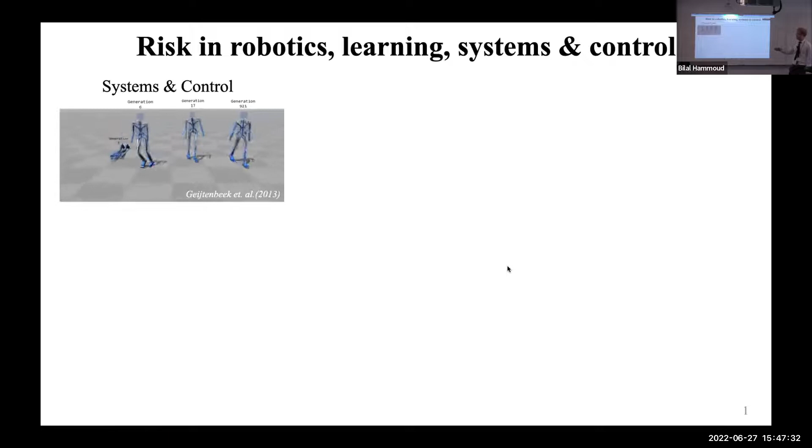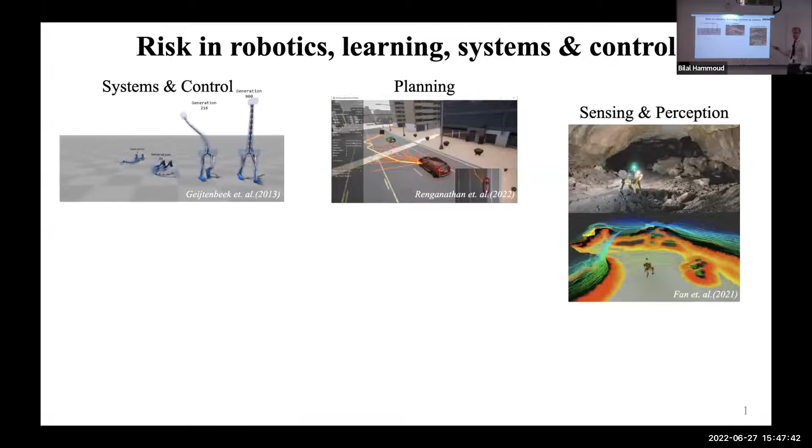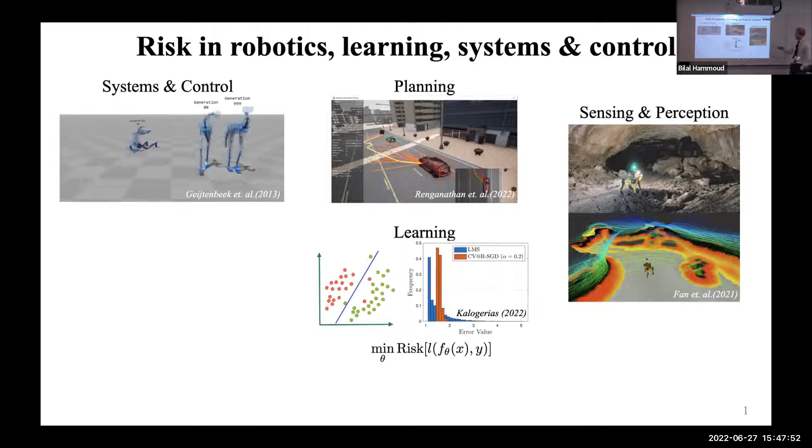For instance, if we look at the bipedal robots over here, risk may measure the likelihood of a failure, right? In autonomous driving, however, risk may measure the cost of a collision. It's a different interpretation. If we talk about sensing and perception, we may have risk maps that indicate risk-free paths. So another interpretation. And in learning, risk has recently been proposed as an alternative to minimizing over the average loss. But how do we define risk when humans are in the loop? My point here is that risk is always a matter of definition.

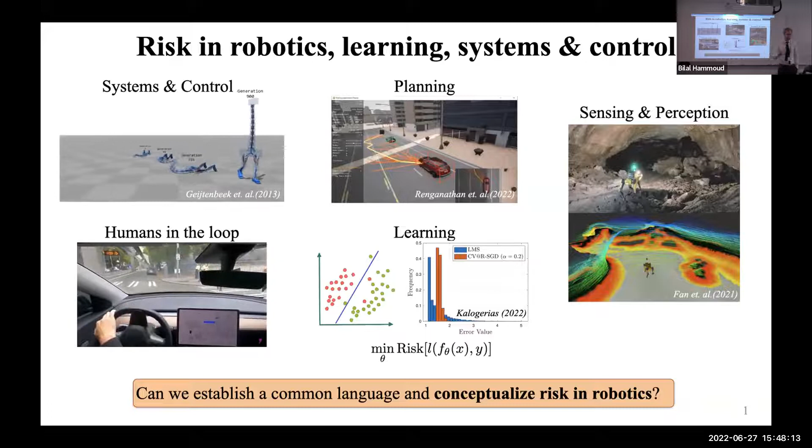My first objective for today, and I think the objective of this workshop, is really to establish a common language to talk about risk and to conceptualize risk in robotics. And I particularly want to do this by bringing in elements from formal methods. My second objective is to then use these new notions of risk to verify AI-enabled systems in terms of their risk. So in brief, what is system verification? System verification algorithms simply check if a system satisfies a specification. So like I said, we are not designing controllers here today.

The way this works is typically you have a system like a car over here and a specification. For instance, you never want to collide and avoid jerky control behavior. You abstract specification and system into a discrete domain. Typically, you use a verification algorithm that will tell you whether or not you satisfy the specification. Now, the question is, why do we want to verify autonomous systems if we can design them in a safe way? Well, most likely, if we design any algorithms, we do this under nominal conditions. However, if we put a system into the real world, there's always uncertainty in our model, in the environment, and in the data that we get.

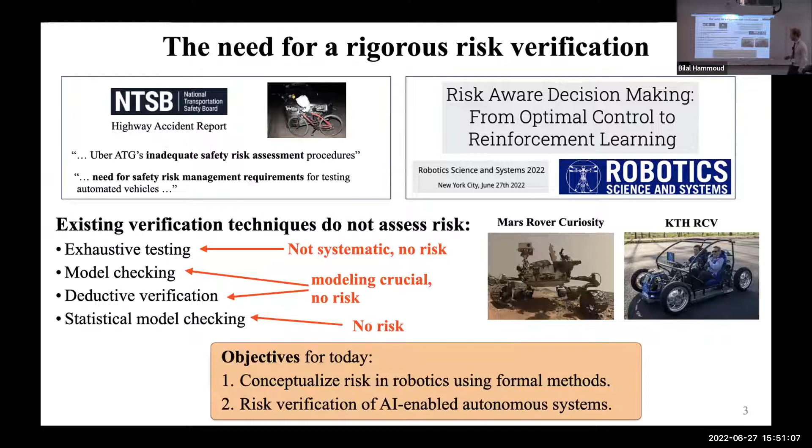And there's statistical model checking. And while this type of literature assumes to have data at hand, there's no use of mathematical risk in the way we want to do. So in summary, the objectives for this talk are first to conceptualize risk in robotics using elements from formal methods, and, like I said, to then use them for system verification. Okay.

I now want to introduce my definition of the risk of failure. And I'm going to give an overview first before I zoom in into the details, all right? Now, in order to talk about risk, we can use risk measures, or as Margaret called them, risk functionals. And I'm just going to repeat them real quick. Let's assume we have a cost distribution over here. Then one risk measure is the expected value or simply the worst case, right? We're here particularly interested in tail risk measures, such as the value at risk, which is the 1 minus beta quantile, or the conditional value at risk, which is basically an expected value over this quantile, okay?

Why are we now interested in tail risk measures? Why don't we use the expected value? Well, simply in that case, we would probably get very good average performance, but we wouldn't be safe, right? Now, if we're interested in safety, why are we not simply using the worst case? Well, if we look at autonomous driving, if we want to avoid the worst case, we shouldn't be driving, right? So in order to get from A to B, we need to be willing to accept some risk, and we need to be talking about tail risk measures, which give us a good tuning knob between average and worst case cost.

Okay, so how do we now define the risk of failure? Basically, the idea that I'm following here is to quantify the risk of lacking robustness against failure. So I'm talking about robustness here. And the reason why I'm doing this is that failure is often caused by lacking robustness against modeling uncertainty, against uncertainty in the environment, or even uncertainty in the data generating process, right? We've heard about distribution shifts today. And I'm going to use two notions of robustness here: spatial and temporal robustness.

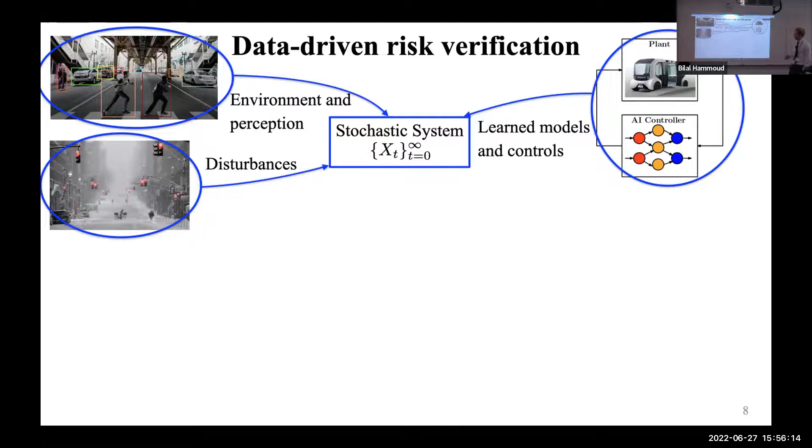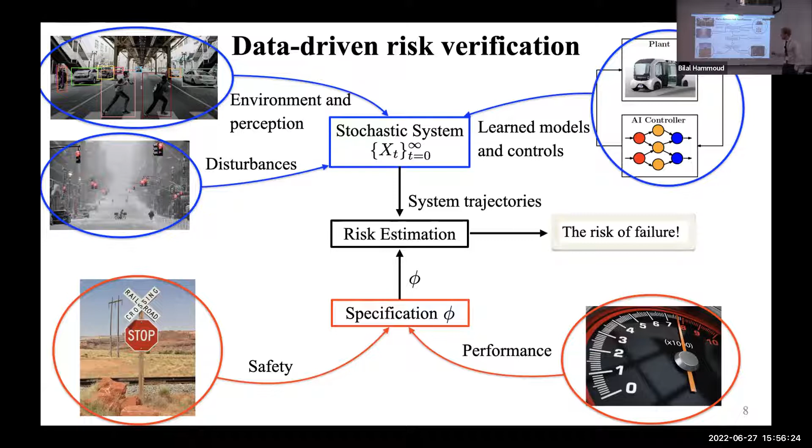Now that we've talked about this, I'm going to give you an overview of the risk verification framework just in pictures. We're assuming that the environment and perception, as well as the system and potentially learned controllers, as well as disturbances, are all modeled as stochastic systems from which we assume that we can draw data, okay? So we can simulate this system. At the same time, we're assuming specifications such as safety and performance, and we're feeding both of these things into our risk estimation algorithm, from which we estimate the risk of failure, okay? So this is the high-level overview.

I want to zoom in a bit now and talk about the spatial robustness risk. And this is again motivated by safety critical applications such as cars or drones, where distances are really something that we're interested in when talking about safety. All of these autonomous systems, they really rely on SLAM techniques to localize themselves in its environment, right? And we're using LiDAR, radar, cameras for this purpose. And naturally, we introduce estimation uncertainty there. We may have also modeling errors that may cause tracking errors in our control, right? So safety really hinges on spatial robustness to such uncertainties and also on risk awareness.

So how can we formally capture this? I've before used this picture of tubes, and we can formally define them basically by taking the distance of a signal X to the set of signals that violate the specification, okay? It's a simple distance to a set, and this will give us this tube. And in fact, it holds that if this distance, this robustness degree, is positive, we satisfy the specification. And if it's 0, it means that we violate it.

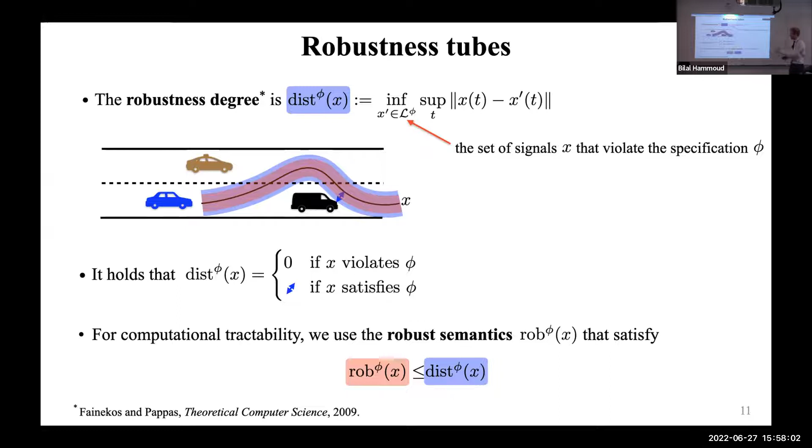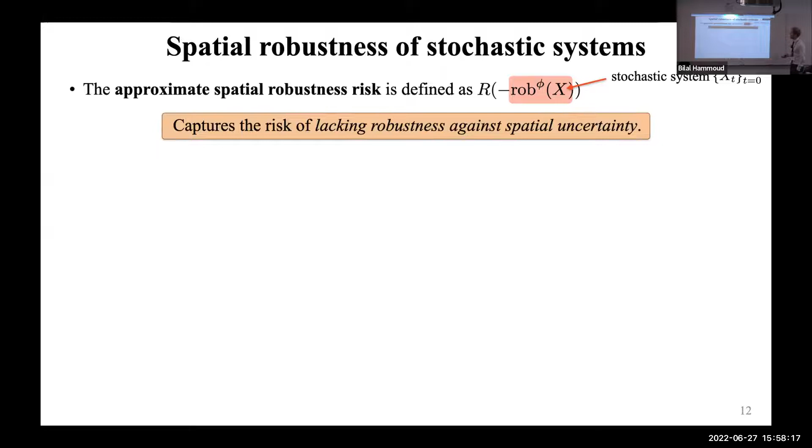So while this is a really nice and neat interpretable definition, it's hard to compute. But what exists there, and I'm not going to give a definition, are robust semantics that you can calculate in closed form. And these robust semantics here in red, they under-approximate the tube that we have. So instead, we're working with a smaller tube that will still give us robustness, okay, as a way of quantifying robustness. So we're using this red notion from now on. And then we define the approximate spatial robustness risk simply by putting a risk measure around the negative approximate spatial robustness, right? That's what we talked about before, which captures the risk of lacking robustness against spatial uncertainty.

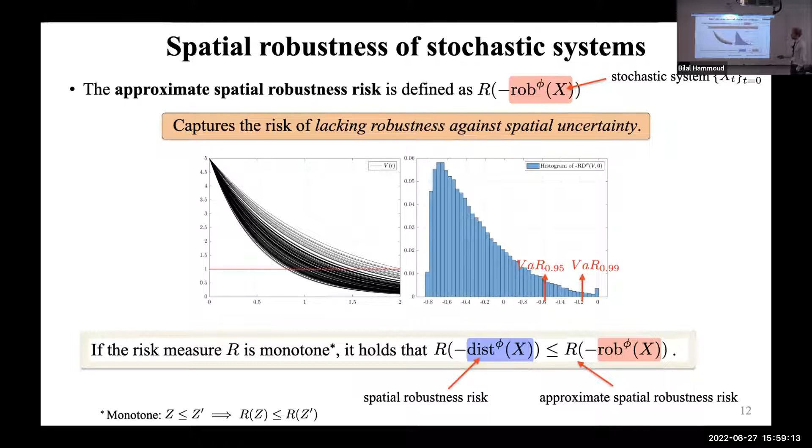A nice property that we have is if the risk measure R is monotone, which is a property that holds for most of the risk measures, then we have that our approximate spatial robustness risk is an over-approximation of the risk we would obtain when using this robustness degree that, however, is hard to calculate.

Okay, next question is, of course, can we exactly calculate this robustness risk? And the answer is no. But we can estimate it from data. And I'm going to show you how this works, for instance, for the value at risk, but you can do it for other risk measures as well. The way we do this is we assume that we have observed n system trajectories, right?

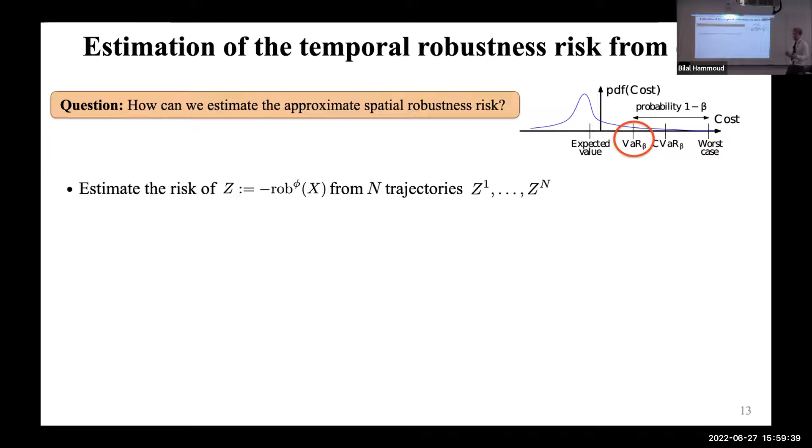So we get n spatial robustness values that we denote by Z1 to Zn, and we assume they're sorted in an increasing order, okay? And then we're basically using a result from Dionysus, who is going to present after me, which is really nice and gives us upper and lower bounds by simply picking the n times beta plus gamma largest and the n times beta minus gamma smallest value, where gamma is basically the square root of 2 log of 2 over delta, delta here is a failure probability, and then again over 2n. And then we know that with a confidence of 1 minus delta, we have obtained upper and lower bounds. So it's really easy for us to get upper bounds that we're interested in.

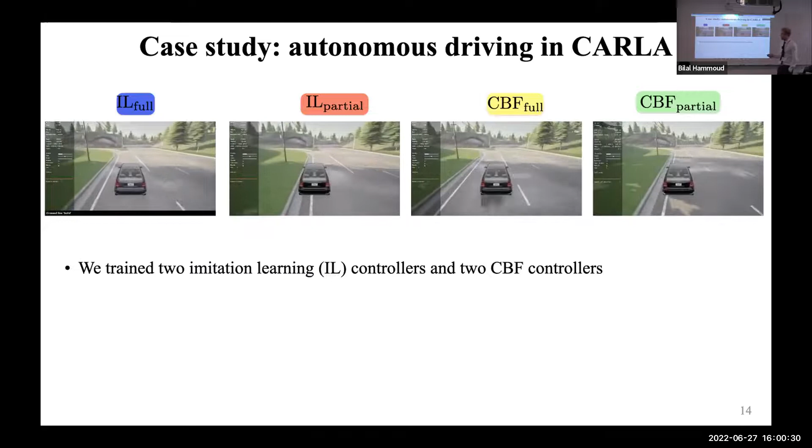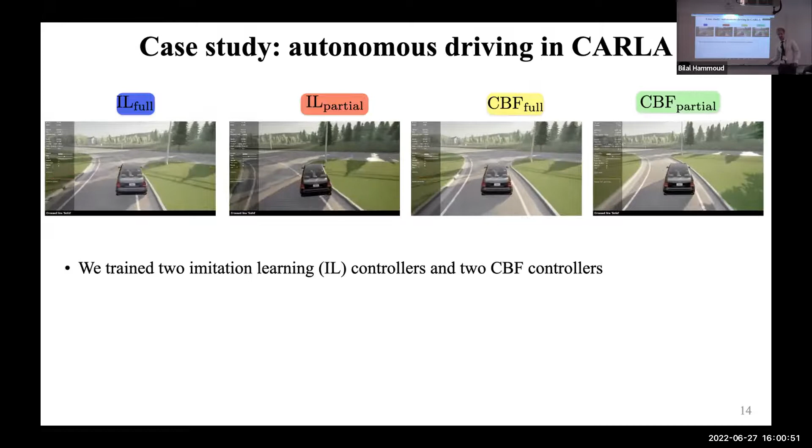Okay, so let's look at a case study. We have an autonomous driving simulator here, and we trained 4 controllers, 2 imitation learning controllers, one with full state knowledge, one with partial state knowledge, and 2 control barrier functions, one with full and one with partial state knowledge. The partial state knowledge controllers here take images from which we estimate the position, okay? And as you can see here, some are doing good, some are not doing good, but we want to verify now how well they're really doing.

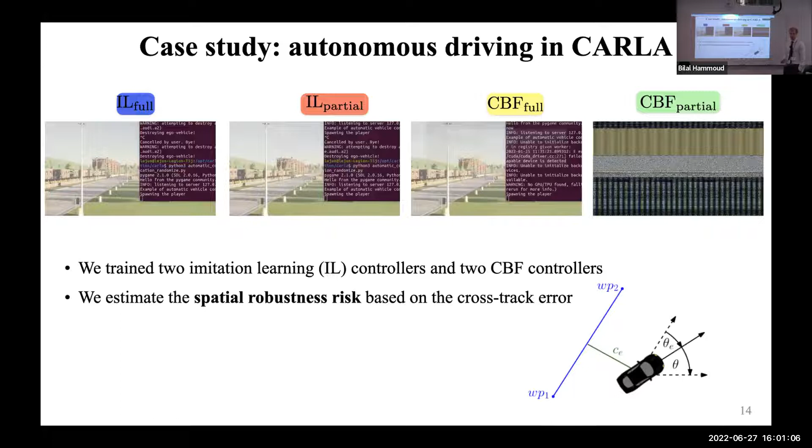And for that reason, we're estimating the spatial robustness risk based on the cross-track error. Now, the cross-track error is nothing complicated. It's simply the distance of the car to the middle of the road. Okay, so this is the quantity we're using here for this verification. The first specification we're looking at is safety. We want that this cross-track error is always below a threshold of 2.25.

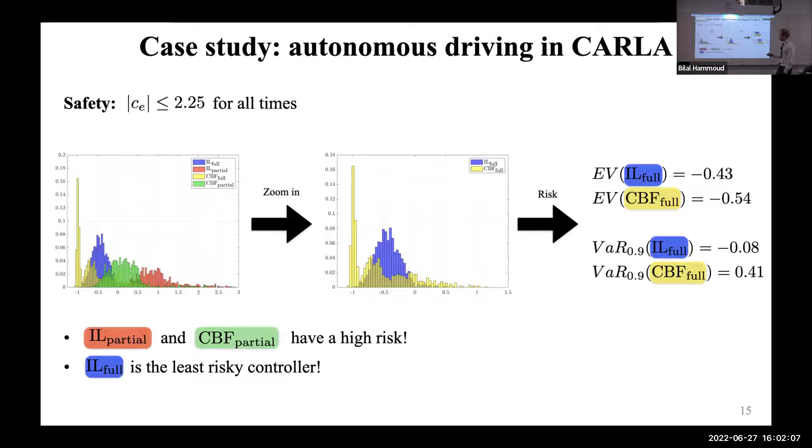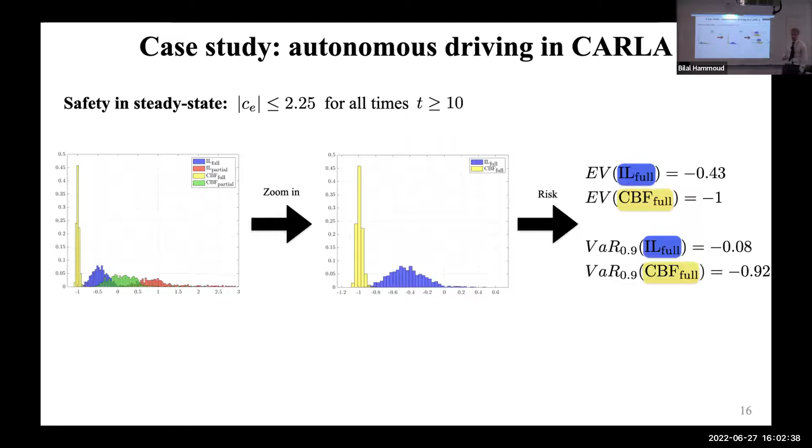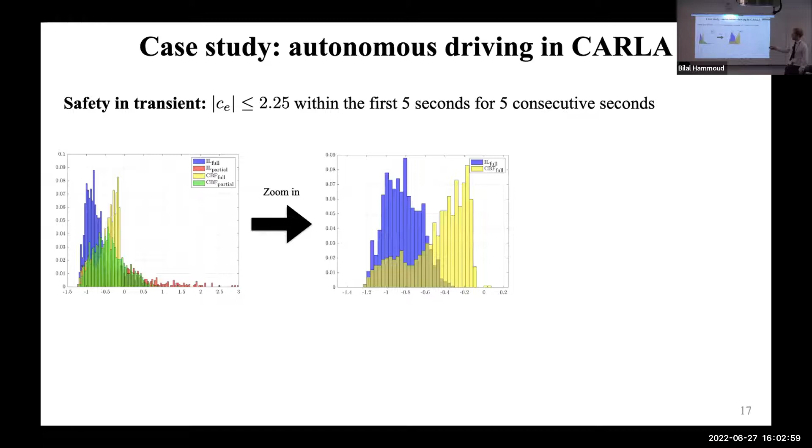However, the question is, why is the CBF controller performing better on average? In order to find this out, we're going to look at safety now in steady state, so after the controller has been running for 10 seconds, really when the car starts moving. In steady state, we look at the same specification, the same cross-track error below 2.25, but only after 10 seconds. And now it happens that the CBF controller suddenly is the least risky one, both in terms of expected value and value at risk, okay? And this means that in the transient, the CBF controller must do a poor job. And this is what we see when we look at the same specification, but we want that it holds within the first 5 seconds for 5 consecutive seconds. We see that the imitation learning controller performs better, is less risky than the CBF controller, okay?

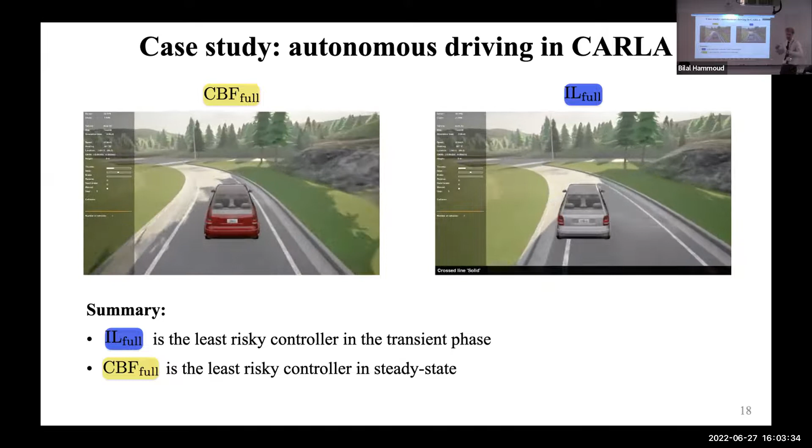Just to summarize this, I have picked one realization of our simulator. The CBF controller in the beginning goes way over the line. So the controller is doing a poor job in the very beginning. But as we're transitioning into the steady state, which happens after 10 seconds, so now, we will see that the CBF controller is performing better. In fact, in a few seconds, you will see that the imitation learning controller here goes over the line, so is not keeping the car within the lane, which the CBF controller does. And this is what you see if you look at a lot of realizations and what we just estimated from the risk.

One thing I want to briefly talk about, I'm not going to spend too much time on it. What we've done is we've calculated risk in a simulator, right? And let's say this is gamma. What can we say about risk on a different course, if we're doing a right turn, or what can we even say about risk in the real world, right? And this is where I think robustness can come in handy, because it can give us upper bounds. Basically, we can get upper bounds on the risk, for instance, on the test track, from the risk on the training track, right?

And what we show is that basically, if we can bound the distance of a nominal and a perturbed system, let's say by delta, then this will imply that the risk of the perturbed system is upper bounded by the risk of the nominal system exactly by this delta. So the kind of trajectory difference will exactly show up in this risk bound as well.

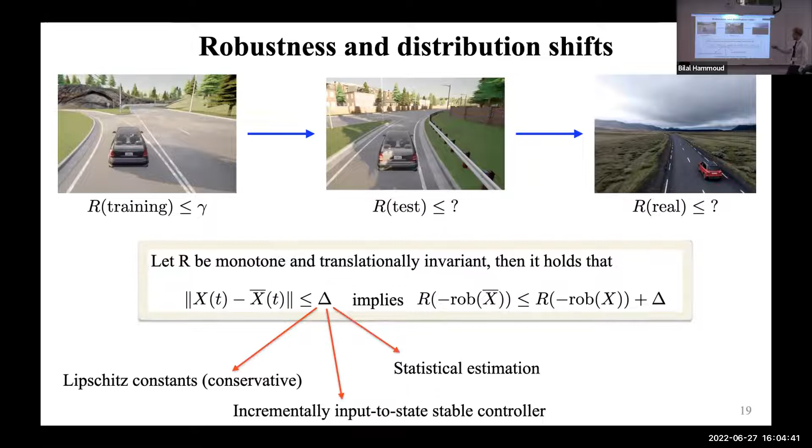So how do we get delta? I'm not going to go into details. We can use Lipschitz constants, which can be conservative and are restricted to some systems. If we have incrementally input-to-state stable controllers, this will give us such bounds, or we can estimate it using statistical tools. Okay, how much time have I left?

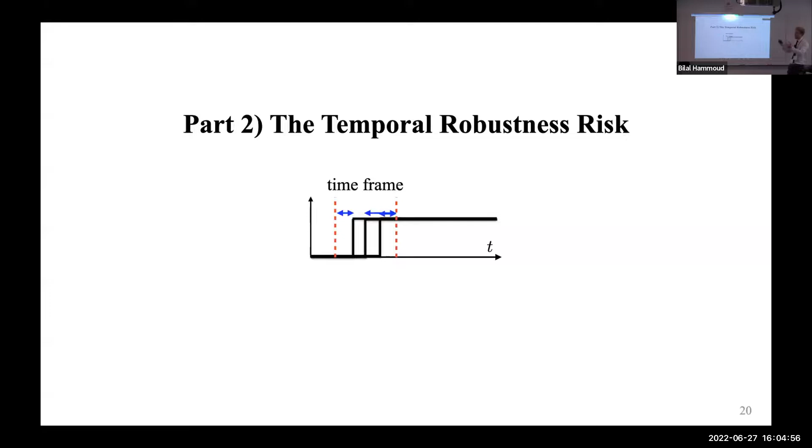Okay, so I'll quickly rush through this. Temporal robustness risk, like I said, is motivated if we're interested in timing uncertainty, such as in time-critical systems. These are systems in which meeting stringent real-time constraints is really of major importance, such as in air traffic control systems, autonomous driving, train scheduling, or automated warehouses.

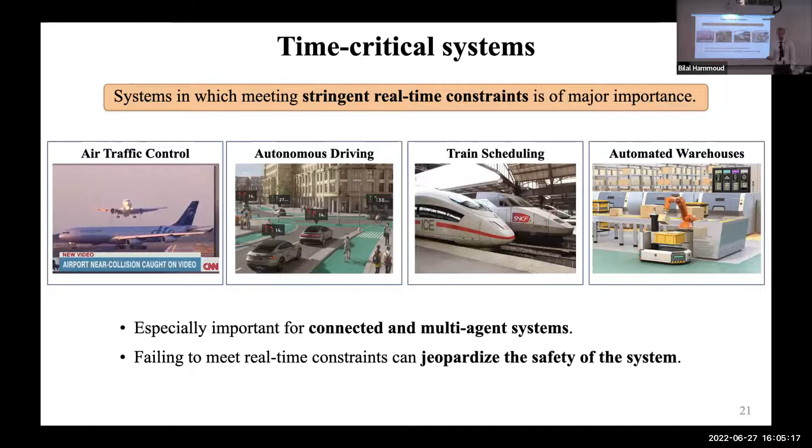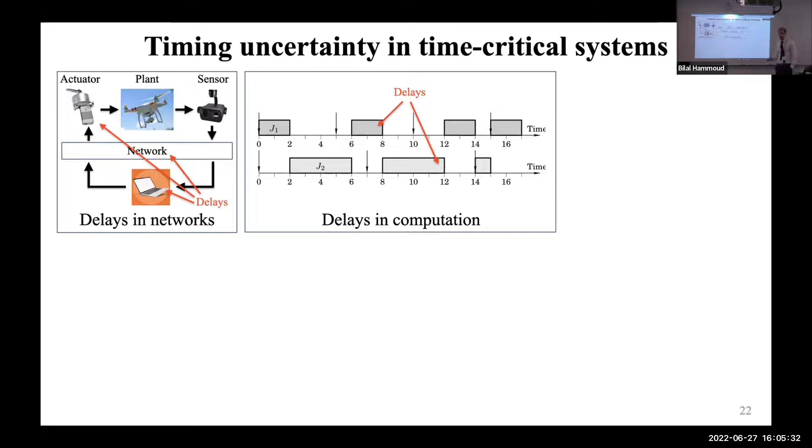Like I said, it's important in connected systems, and failing to meet these real-time constraints can jeopardize the safety of the system. So what may be reasons to fail to meet real-time constraints? In networked control systems, there may be delays in computation, communication, actuation, and sensing. On embedded hardware, we may have delays in scheduling. In connected systems, we may have various delays in traffic participants.

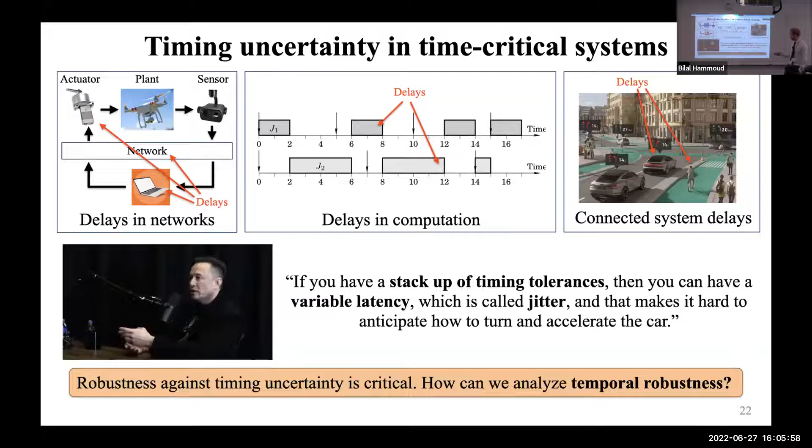In fact, Elon Musk stated with respect to autonomous driving that if you have a stack-up of timing tolerances, then you can have a variable latency, which is called jitter, which can really make it hard to anticipate how to turn and accelerate the car. So in summary, robustness against timing uncertainty is really critical. But how can we analyze and define temporal robustness? I want to introduce our two notions of temporal robustness on a simple example.

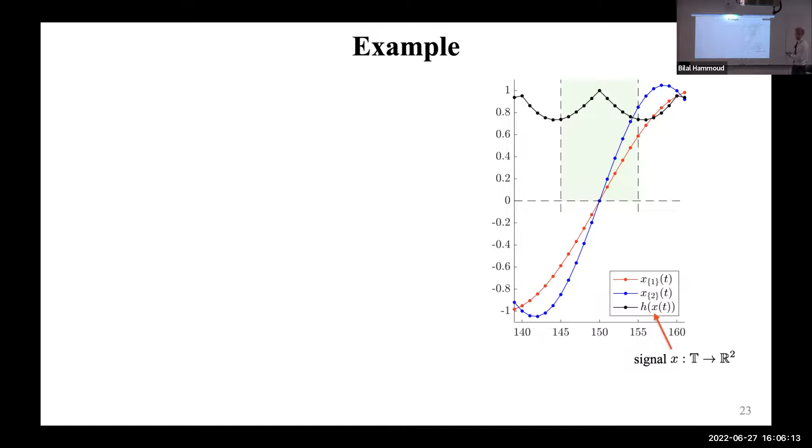Let's say we have a two-dimensional signal x that consists of x1 in red and x2 in blue. Our specification is that the difference between these two signals is always below 1, between 145 and 155 seconds, so in this green box. Then we can define the satisfaction function, which is 1 if we satisfy the specification and -1 if we violate it. So if this black curve is below 0, the specification is violated.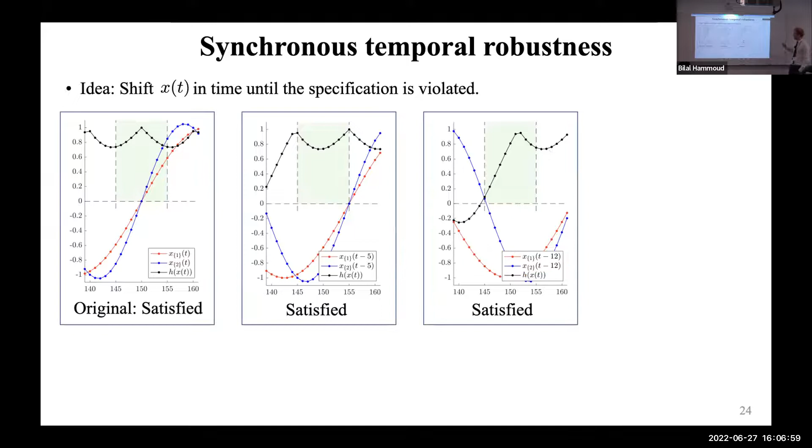First, we define the synchronous temporal robustness, and the idea there is simple. We just shift the whole signal to the left or right until we violate the specification. If we shift by 5 time units, the specification is still satisfied. Let's shift a little more. At 12 time units, the specification is still satisfied. But if we shift by 13 time units, we violate the specification.

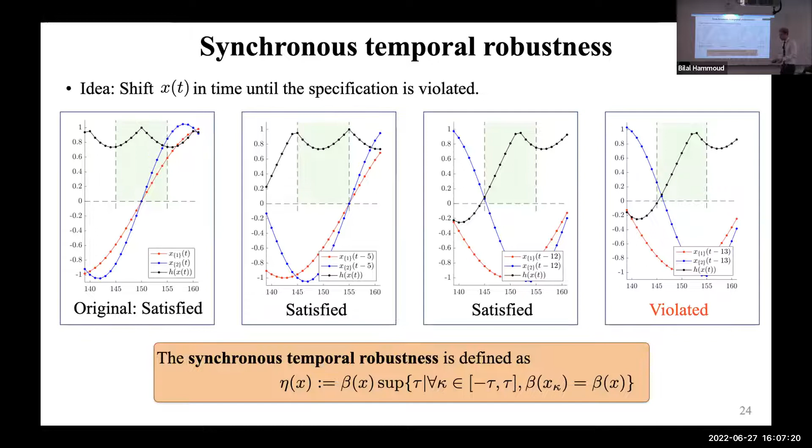It turns out in this case that the synchronous temporal robustness is 12, meaning we can shift by 12 time units to the left and to the right without violating the specification. Formally, the synchronous temporal robustness eta is the maximum time shift for which we still satisfy the specification. Now, this is a really simple definition, and we're more interested in asynchrony, if we have several agents involved.

Therefore, we define the asynchronous temporal robustness, where we shift the signals x1 and x2 independently to the left or right, so asynchronously, until the specification is violated. In this example, if we shift the red signal by 1 to the right and the blue signal by 1 to the left, we still satisfy the spec. If we shift a bit more, we still satisfy it. But once we shift by more than 3 time units, we violate the specification.

In this case, the asynchronous temporal robustness is 3. So we can individually shift both signals to the left or right by up to 3 time units. And we can again formally define this as the maximum individual time shift while still satisfying the specification.

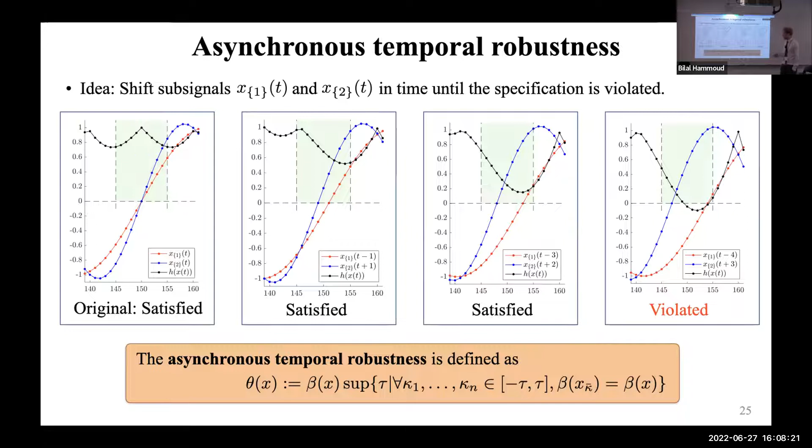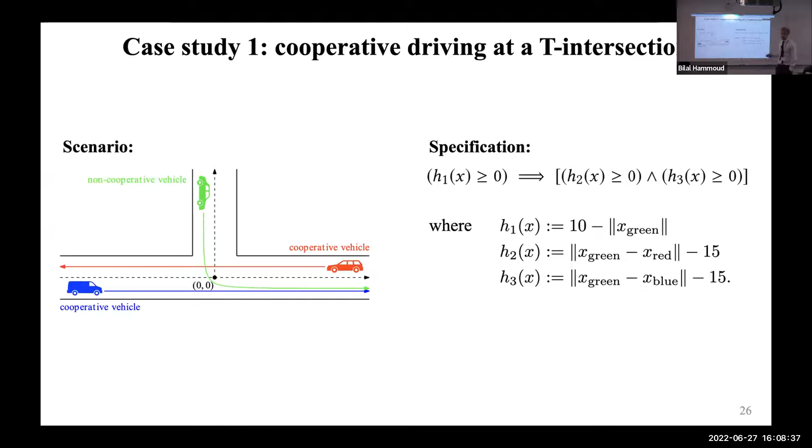The first case study is a T-intersection. We have a Boolean specification, which means that whenever the green car is in the middle of the road, it should have a safety distance of at least 15 meters to the blue and the red car. On the left, you see the scenario when no car has a delay. On the right, the green car starts 12 seconds too early and the red car starts 12 seconds too late, and due to the delay, the specification is violated.

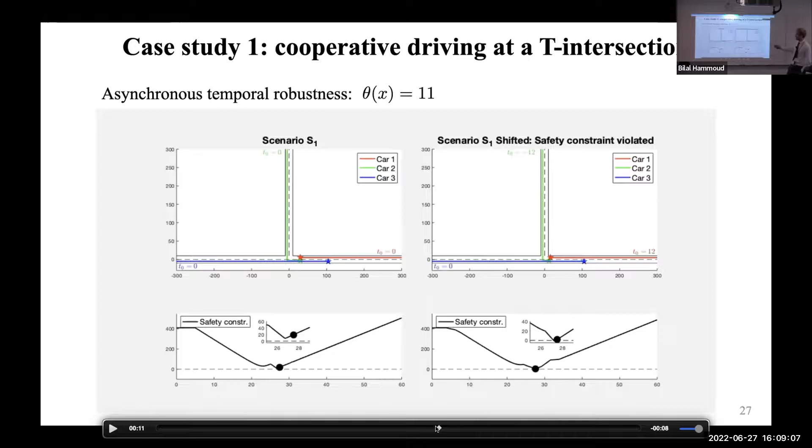When the green car is in the middle of the road, the red car is really close, kind of violating the safety spec. And the asynchronous temporal robustness is 11 here. Since we shift by 12, we violate it.

Another one I want to briefly mention is for a temporal logic specification. Roughly, it means that both robots should recharge in the charging area for some time. They should eventually gather in region B, and they should periodically visit region A over here. So a more complex specification, the sub-specification you see here, and they're satisfied when the signal is green. So we're recharging both robots. They're going to meet in region B and satisfy all of their specifications.

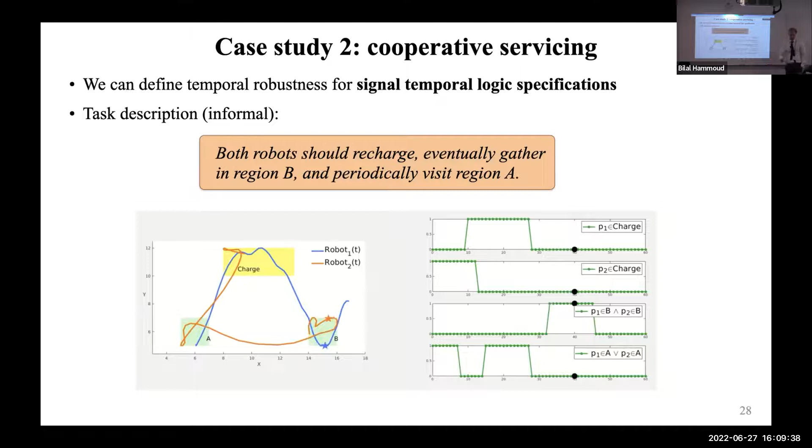Now, the synchronous temporal robustness is 7. If we shift both robots, if we start both of the robots 8 time units too early, we see that we violate the charging requirement of the second robot. It will not be sufficiently long in the charging area.

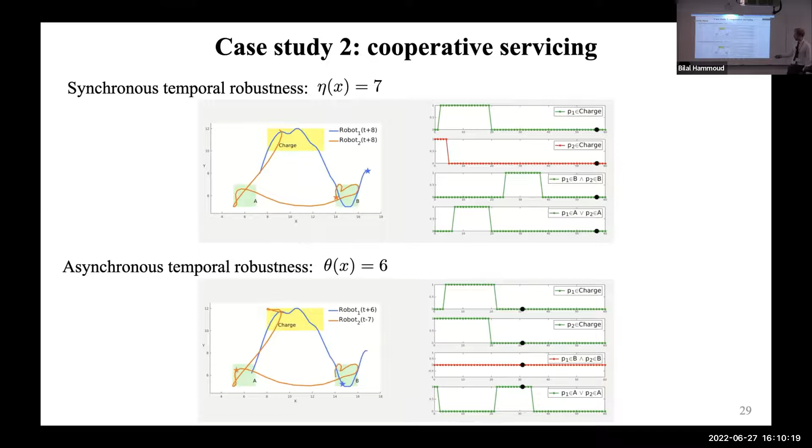The asynchronous temporal robustness here is 6. So if we let robot 1 start 6 time units too early and robot 2 7 time units too late, we see that both robots will not have their rendezvous in region B. So they will be shifted in such a way that they can't complete their collaborative task in region B. You see basically here when robot 1 leaves region B, robot 2 will be about to enter. Okay.

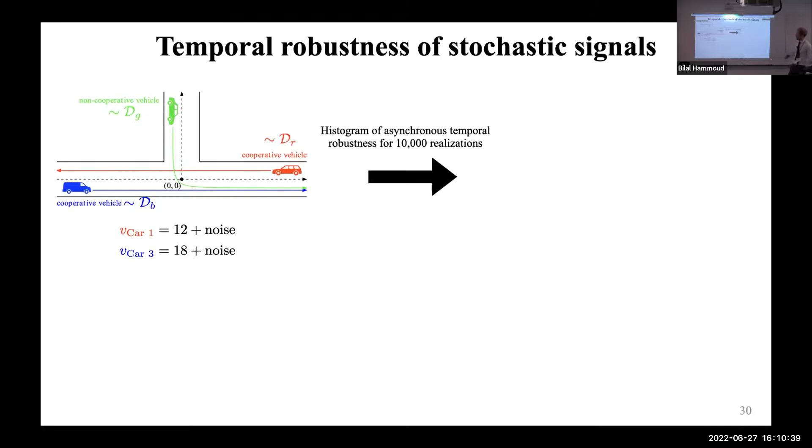Now, these notions are defined for deterministic signals. In reality, of course, we always have stochastic systems. We have some noise on top, right? So here, in this case, the velocity of the cars may be subject to some noise. So if we draw, let's say, 1,000 or 10,000 realizations, we get, again, a distribution of temporal robustness values. And in the same way we defined the spatial robustness risk, we're defining the temporal robustness risk by using a risk measure and putting it around the negative asynchronous and synchronous temporal robustness.

Okay, I guess I'm running out. Oh, okay, then I was hurrying for no reason.

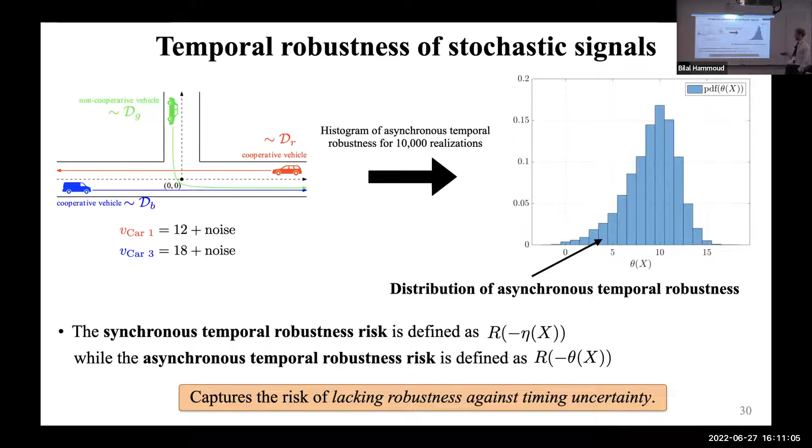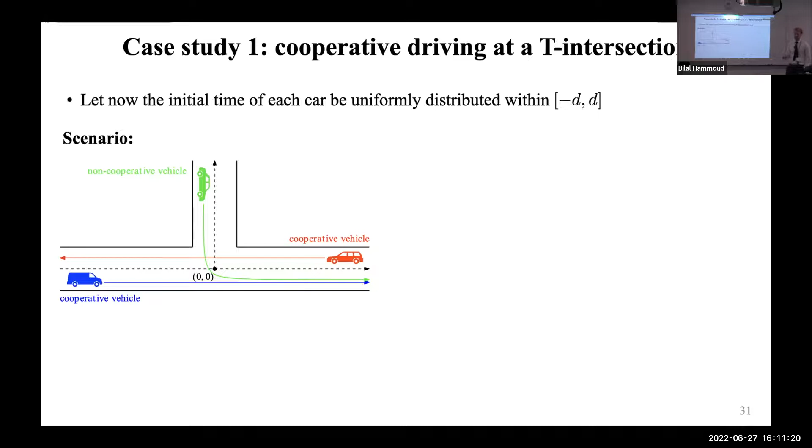Okay, so this is the risk of lacking robustness against timing uncertainty. So first case study here, we just assume that the initial time of each car in this T intersection scenario is uniformly distributed within minus D and D, and D is a maximum permissible time delay that they may have. We calculate the value at risk at the 5 and the 2% quantile, and naturally we see the more timing uncertainty we allow here, so as we go down these rows, the higher the risk will be.

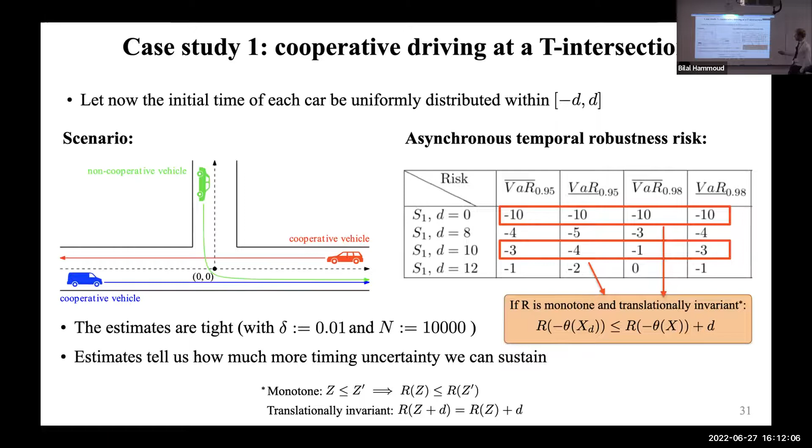Okay. We can also see that the estimates are tight. So when we compare columns and upper and lower bounds, we see that the estimates we get are really tight. We get good information basically, and these estimates also tell us how much more timing uncertainty we can sustain. For instance, if we're looking at the first row over here where we are not allowing any time delay, we have a risk of -10, and we can use this to upper bound the risk when we have a delay of 10. In fact, the theoretical bound here is 0, and as you can see from the experiments, this is kind of respected.

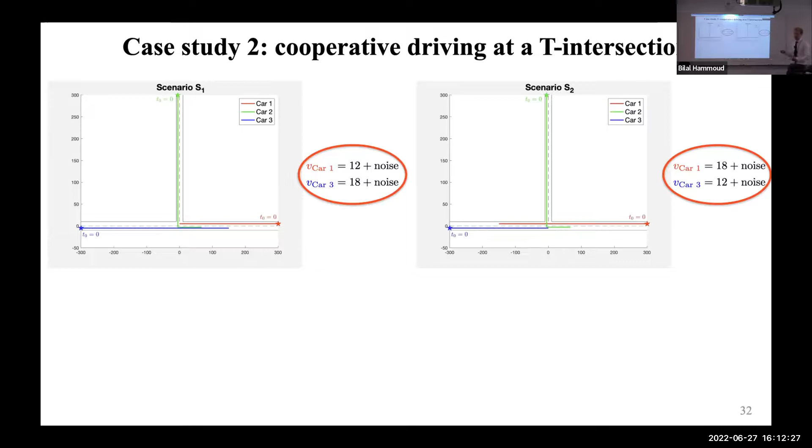The last case study I want to show here is basically the scenario we saw before, scenario 1, and scenario 2, where we flip the velocities of the red and the blue car. Okay, and we want to use risk measures to compare which of these scenarios is more risky. In fact, something interesting happens if we look at the 15% quantile. It holds that scenario 1 has lower risk, while if we look at the 5 and the 2% quantile, scenario 2 has lower risk. Okay, and this is what we also see when we plot the histograms.

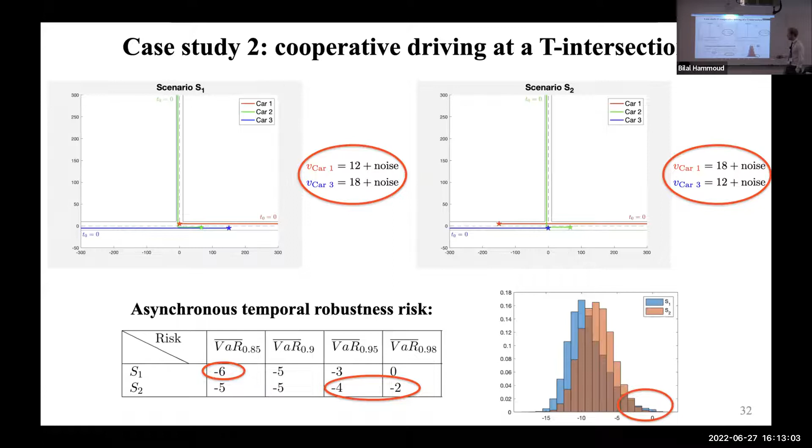Basically, the mean, in a way, of this blue distribution of S1 is lower. However, it has this tail of non-robust realizations, right? That may be important when we're talking about timing uncertainty. In fact, here it goes even positive, which means that the specification is violated. Okay, and by that I would like to conclude.

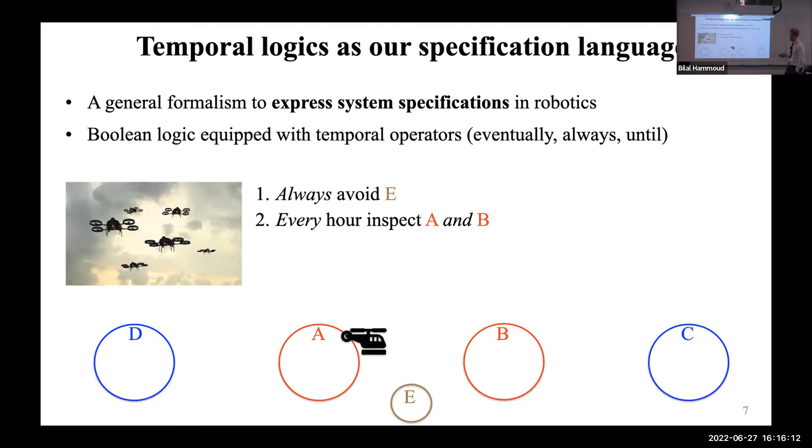Wait, let me maybe go there. I'm stuck here. Are you talking about this basically? Yes. So you basically say I have this risk measure and I have my robustness function, and then when you proceed in the presentation, you speak of different robustness criteria, but it wasn't very clear. So do you augment all these functions, or depending on whatever scenario you have, you pick?

Let's say you have a system X, and you have a specification phi. That is your temporal logic specification, something complex. Go from A to B, avoid a certain region, right? Then you can just calculate based on a trajectory what robustness this trajectory has with respect to a certain specification. And you can either talk about spatial robustness or temporal robustness. And then it depends on what you're interested in. Are you interested in spatial robustness or in temporal, or maybe in both?

But the point is, for one realization, for one trajectory, you will get a robustness value with respect to the specification. And since you have a couple of realizations, you will basically get a distribution. So all of this, minus rob of phi of X, will be a distribution. And that's why you can define the risk over it. That makes a lot of sense. Thanks a lot. Yeah, I should have maybe spent a bit more time. So now we have a lot more questions. Okay.